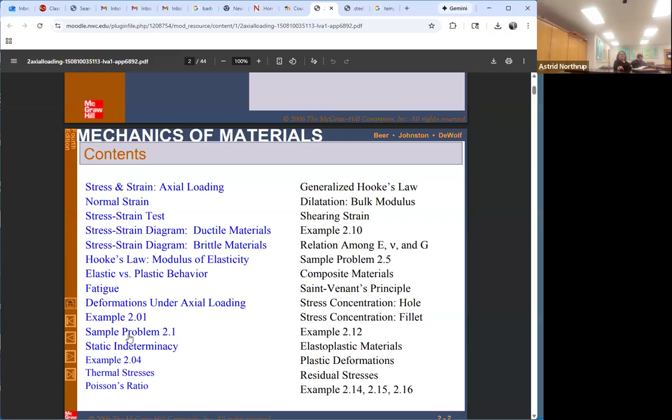Okay, so if you look at this - and this is available to you on your Moodle page - this slide pretty much goes through everything that we will need. We had talked about, let's see, I want to go through and make sure I cover this. Why do we care about this?

Well, as engineers, I heard somebody once say the art of engineering is doing with one dollar in a day what anybody could do with ten dollars in a week. So I mean, how could we make everything strong enough for everything?

Well, we could build it out of solid titanium, right? We could do that. It reminded me of one of my cousins who's a mechanical engineer, used to work for a company called Magnetohydrodynamics, and they were looking for a particular kind of lining to a piece of equipment that had certain properties. They'd been using copper, and it just missed the mark a little bit.

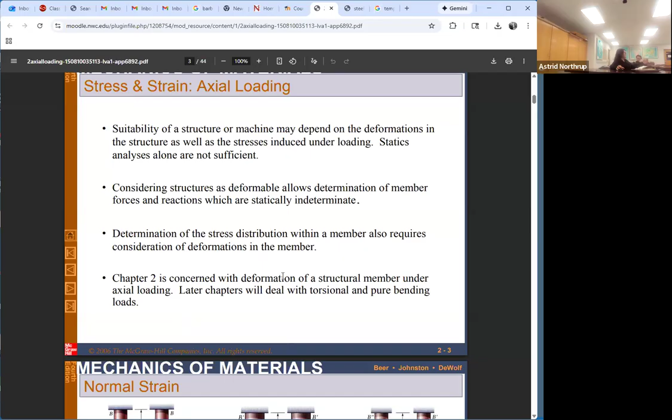So somebody suggested that they line the unit with platinum. Well, platinum was at that time hundreds of times as expensive as copper, so you really have to weigh that against what you're doing. We don't want to use platinum or titanium for everything, or build everything like you could land a helicopter on it. You want to design it appropriately and safely while still staying within economic control. So that's what this chapter is all about.

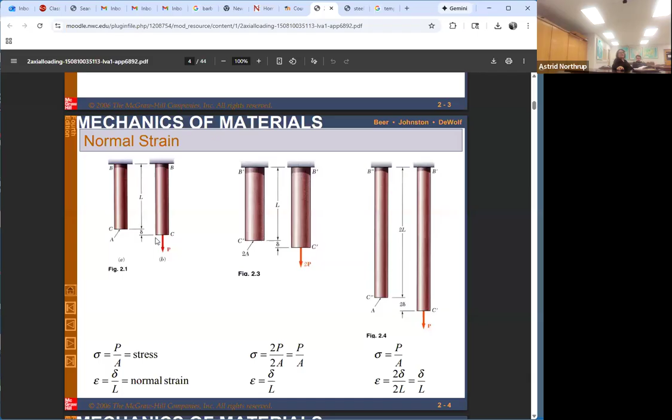Okay, normal strain. Normal, once again, does not mean as opposed to abnormal, it means as opposed to transverse. Normal just means perpendicular. Normal strain is an elongation along the axis, and the axis is whatever is being pulled upon, generally speaking.

And we talked about the stress strain diagrams, which I just think are amazing. And we talked about the difference between ductile materials and brittle materials, and we discussed how things deform.

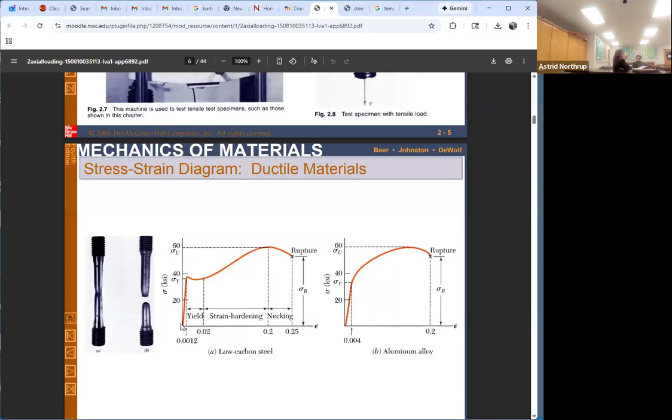So the slope of that line is sigma over epsilon, and that number is referred to as the modulus of elasticity. The modulus of elasticity only applies on the straight line, or elastic, portion, but it is a characteristic of the material. In other words, if you know what the modulus of elasticity is, you don't really know what the material is, but you definitely know many things that it is not.

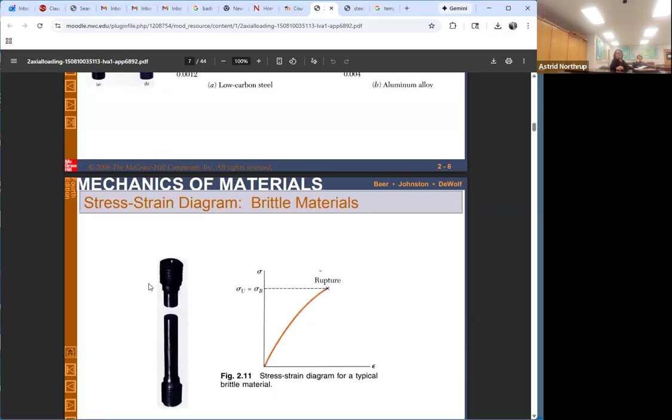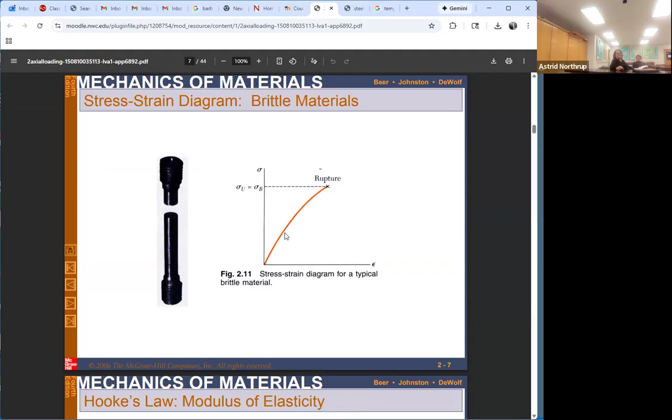Some things have the same modulus of elasticity but yield at different places, for example. So they're not exactly the same, but if it doesn't have the modulus of elasticity you're looking for, it's something else. This is how brittle materials break - they do not stretch, they do not neck, they just break, pop. This is what a sigma versus epsilon stress strain diagram looks like for a brittle material: pull on it, it does not yield, it does not change, it just breaks.

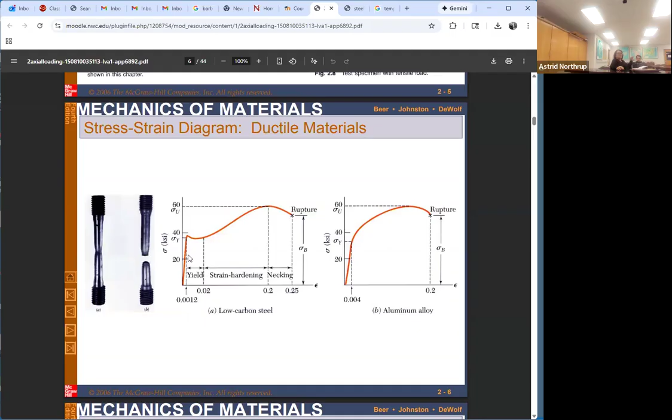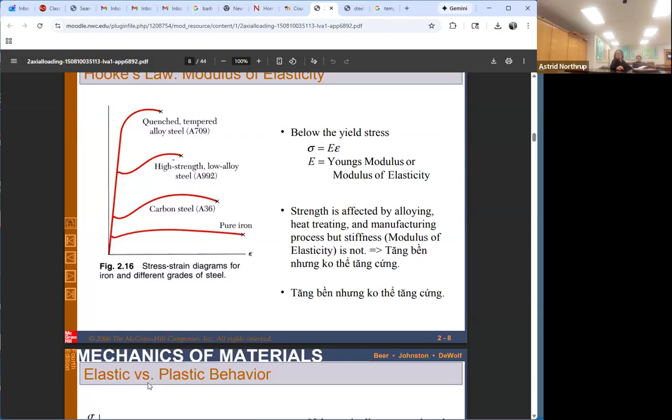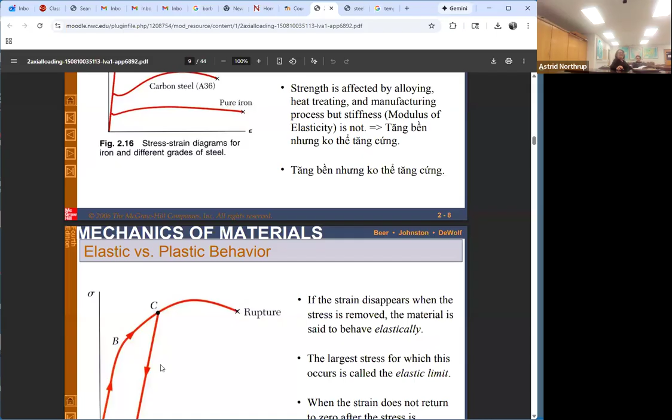Well, now that's an interesting comment right there, isn't it? In some other language, I had never seen that before. All right. I know. I don't know, something like that.

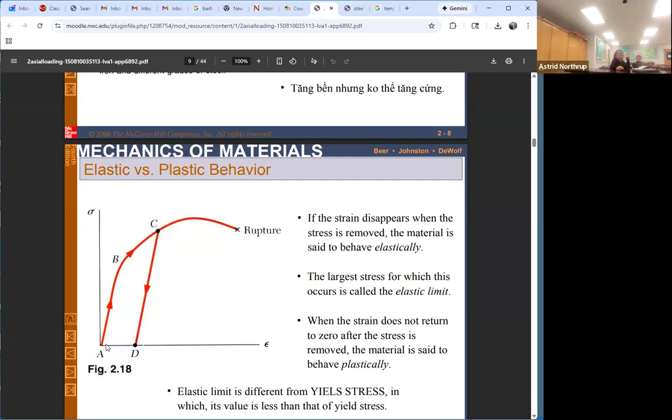So if a strain disappears when the stress is removed, the material behaves elastically. But if you've exceeded yield and you remove the stress, it may not go back to its original shape. It may have taken on a permanent set or permanent deformation, which is what this line C to D indicates. It means even if you pull this particular material past yield and then remove the stress, you still have a strain, meaning the material has elongated or changed in some profound permanent way. So those are just some ideas about stress and strain.

All right, so if you deform something with a normal stress with an axial load, you will have an increase in length in the amount of delta.

Del is in units of length. Strain is del over the original length L, so it is dimensionless. Epsilon, strain, is dimensionless. So it's the fraction of elongation or shortening.

So if you equate these things, you find out that del, this change, is equal to P, which is the load. P over A is the sigma, right? L, which is the original length, E. So PL over AE, this is something you will remember. E is the modulus of elasticity, which is the property of that material.

So you can also see, since epsilon is equal to del over L, if you divide out L, you get epsilon is equal to P over AE. And if you work the units out, they come out beautifully.

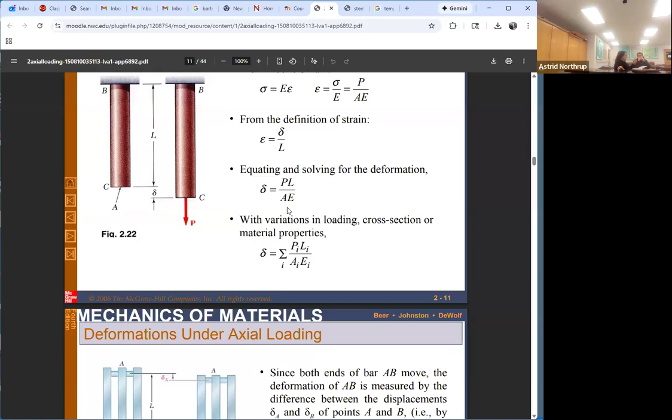E is a big number. It's usually like 10 to the 6th if you're in PSI. So del is tiny because the elongation, unless you're dealing with silly putty or something, is not huge.

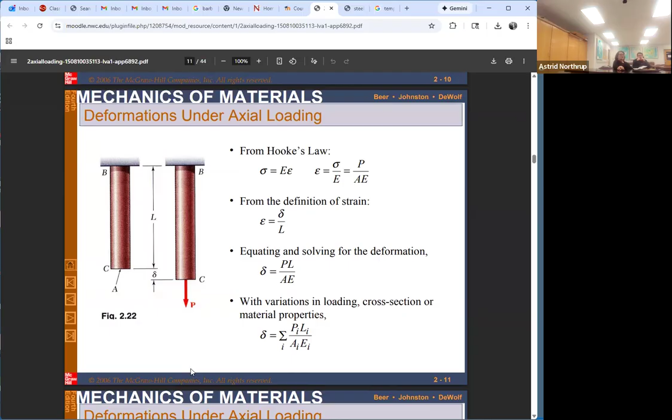But sometimes you'll have a column, like a slender column made out of some other material underneath it, and you pull on it. You can use this as a summation equation. In other words, you can look at one bar and the other bar and then sum them, and the overall del will be equal to the total of the two, or three or four, however many bars you put together.

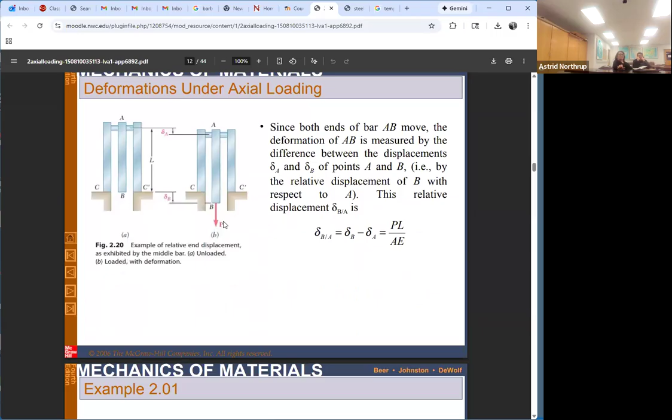All right, here's an example. We have a bar here and a smaller bar here. We pull here and we pull here, push here, and we pull here. We are told what E is, we're told the diameter, and we want to find out the total deformation, the total del.

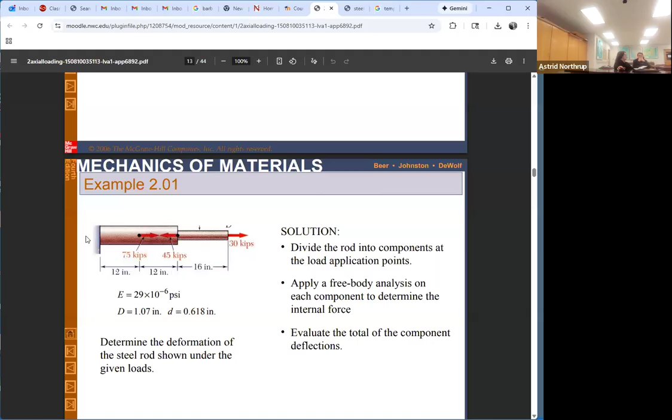Well, the first thing is, if you realize this wall is going to have a reaction, just like in statics, right? 75 minus 45 plus 30, that's 105, that's 60, right? So this is going to pull, the wall is going to pull back with a force of 60 kips.

That means that if you do a cutaway, if you look at this section, it's going to be acted on with 60 kips. This is going to be acted on with 60, or 75 minus 60. This is going to be 60 minus 75 plus 45 and so forth. But I have to go check my math on that.

But basically, every time that you have a discontinuity, every time that you have a change in load, or a change in material, or a change in size or shape, you have to analyze those segments separately.

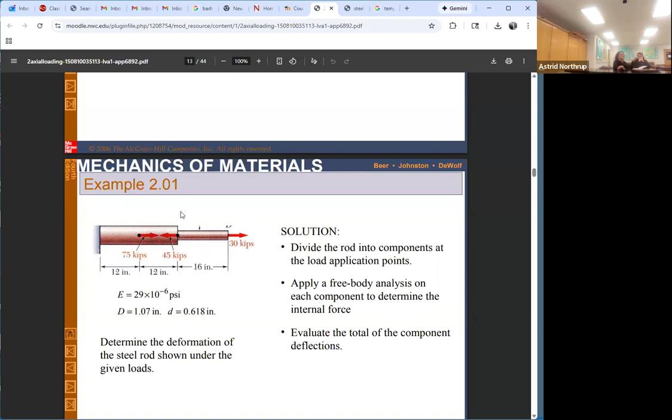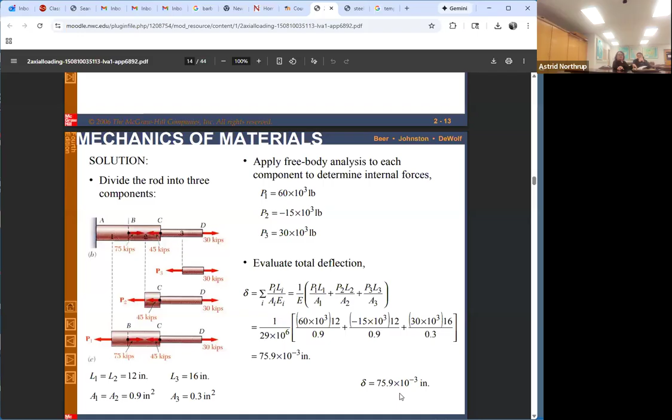All right, so there we go. That's what they're talking about. Just like that, we have P1, blah, blah, blah. Do all the dels, add them up, and you get an answer.

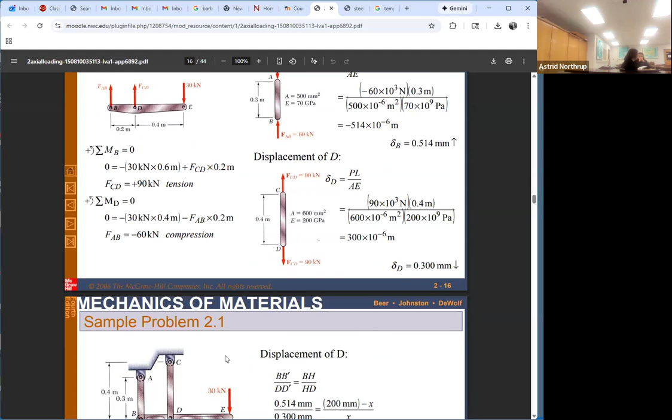And this is kind of the same thing. You analyze this kind of like, not exactly, it's kind of like a frame, not a truss, but you have to find those external forces. So you use those good methods of statics, which is why we did the review on trusses, so that you could do the method of sections, method of joints, and remember how those internal responses occur. And then you come up with these answers.

These are interesting. These problems, columns like this, are called statically indeterminate, meaning you cannot solve them based solely on methods of statics. If you have a column like this and it is fixed at the top and fixed at the bottom, it really can't go anywhere, right? So it can't really expand or contract. But if you pull on it, parts of it can expand and parts of it can contract.

So the best way to think about it is what they call superpositing, or using the method of superposition. You pretend like the bottom isn't here, and you analyze it as though it was allowed to deform however it wanted to. And then you add back in the deformation that the responsive force at the bottom has, and you sum the total del to be whatever it is, zero.

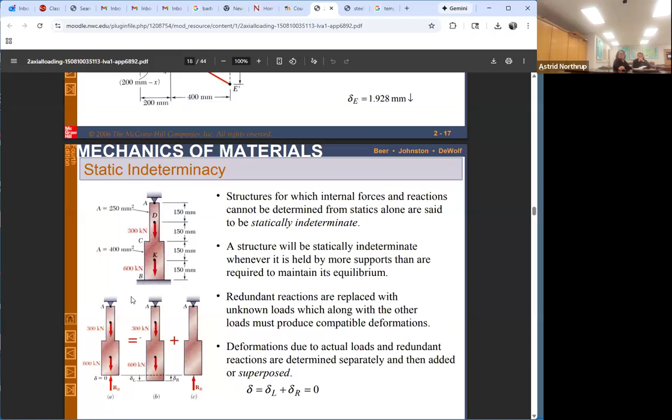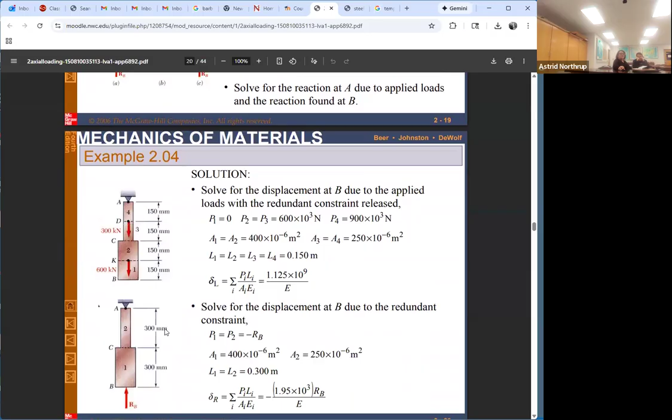We also have some problems where the total del is not 0, but there may be a small gap that would be exceeded, and then it starts pushing back. So all of those things are interesting in terms of mechanics of materials and static loading. You can see we have a del L and a del R, and we know that has to equal 0.

So, thermal stresses. Have you guys worked any problems with thermal stresses yet? What happens when you heat something up? It expands. What happens when you cool something down? It contracts. And it depends on the nature of the material.

This equation tells you, if left to its own devices, if you heat up a material, and this delta T is always TF minus TI, so it's positive. Almost every material will expand if delta T is positive - if the temperature is higher than it was to begin with. It will contract if the opposite is true. Alpha is the coefficient of thermal expansion.

Once again, alpha is going to be a characteristic of the material. Different materials have different expansions based on thermal behavior.

We know that del due to a P, a pull or a push, is equal to PL over AE, and del due to a T is equal to alpha, that characteristic, times delta T times L. So if you have something being pushed on and you have a thermal deformation, you can add them together to get the total deformation.

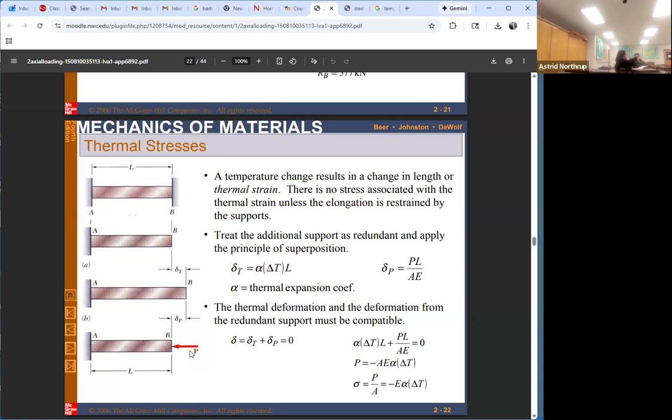If it's constrained like this, what happens is, if you increase the temperature, it pushes against both supports, but you can just envision it as pushing against one support. So you use the method of superposition to say, okay, thermally it would expand this way, but really it expands nothing. So del sub P plus del sub T has to equal 0, or if there's a gap, it just fills in the gap.

Then we start talking about Poisson's ratio, which is another characteristic of the material. What this means is if you have a bar of some sort and you pull on it on the axis, on the transverse section, it's going to shorten up, because everybody has to be somewhere. So if you pull it long, it contracts a little bit.

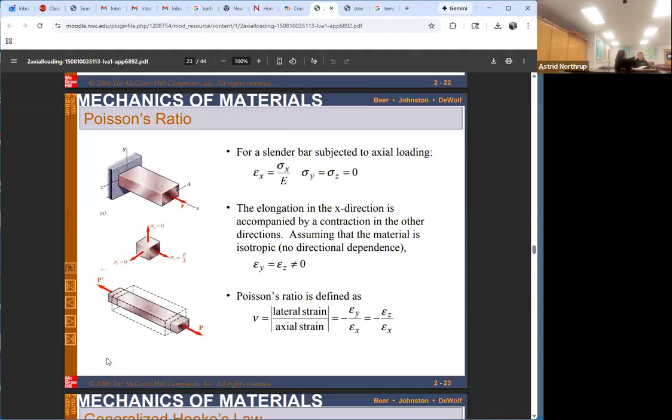Poisson's ratio tells you how much that contracts, and it's always negative. Pull on it, it gets smaller - that's why it's a negative value.

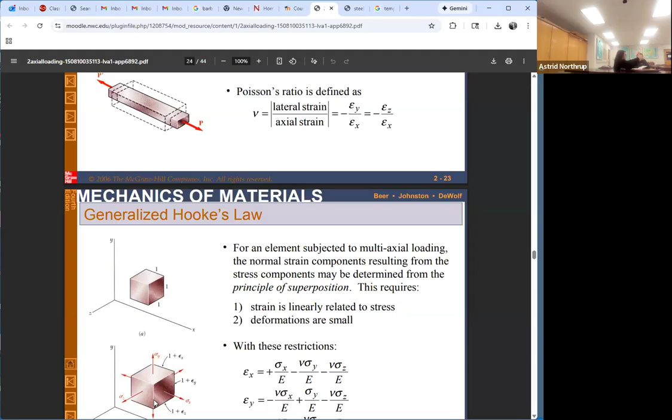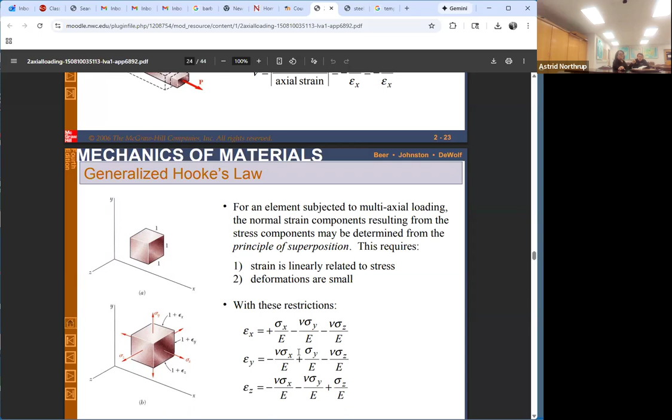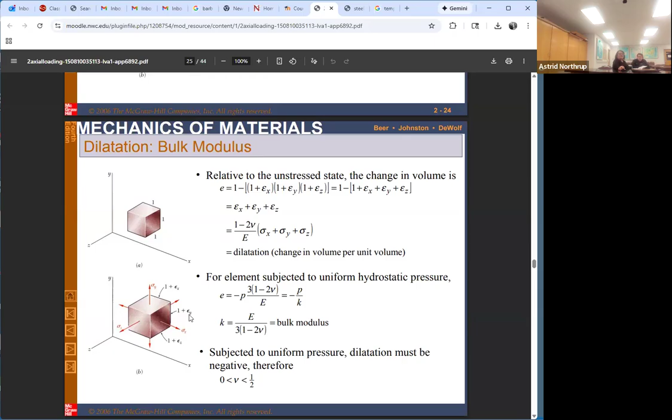This equation gives you Hooke's law in a generalized fashion, meaning the total epsilon x based upon the pull on the x-axis, minus the pull on the transverse sections. And then the bulk modulus, which is kind of the same idea.